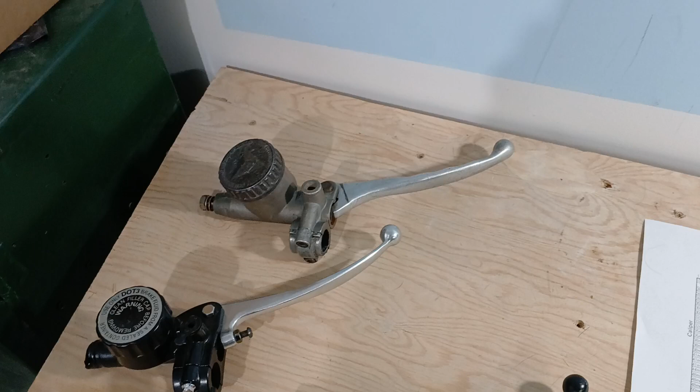Okay, we're going to talk about brakes today and our ways of improving the brakes on the 1974 Eldorado with a single disc, which has been criticised by other people as being a poor brake with a wooden feel. Now, I haven't ridden this bike. It was bought by me as a non-runner and I didn't want to use it until I fixed everything up.

Okay, so thinking about brakes, what to do, because the consensus of opinion seems to be to add a second disc. Now that can be expensive because you've got another disc to buy, and they're not easy to find for those. You've got another caliper to buy, you've got extra hoses to put on. Okay. And you have to make a spacer up for the spindle and various other things. It's quite a complicated job. Is it really necessary? Well, I don't know. So let's think about it for a moment.

Now, another bike that has a reputation for having a very poor brake from the early 70s is the Norton Commando. And I can attest to the fact that the Commando brake is pathetic. It is wooden and hardly stops you at all.

And sadly, this was deliberate by Norton Villiers Triumph, I think they were called at the time. They decided that the British motorcyclist shouldn't have a good brake because he wouldn't know what to do with it. He'd get himself into trouble if he had good brakes because British motorcyclists are used to having shitty drum brakes. And anyway, the only reason we're giving you one is because the Honda's got one and we don't want to lose sales to the Honda. Anyway. Rant over. So anyway, the Norton's got a bad brake.

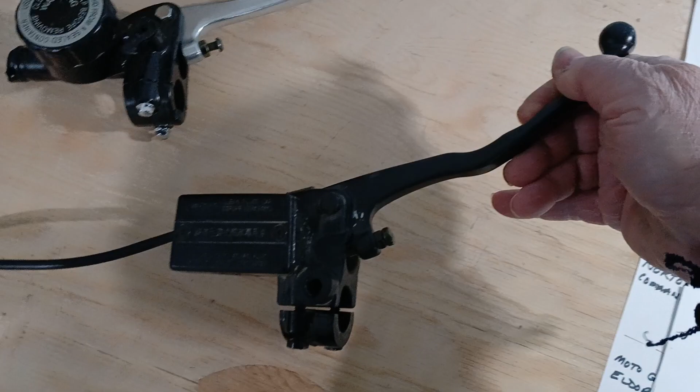But there is a recognised way of improving that brake, and that is to add a 1/2-inch master cylinder in place of the 5/8. And that's what I was going to do on my Commando, and I've got this 1/2-inch master cylinder here.

Okay, now I remember seeing on the internet a few years ago a chart with optimal sizes of master cylinder to caliper size and where to aim for. Now this comes from a company called Vintage Brake, who are out of California.

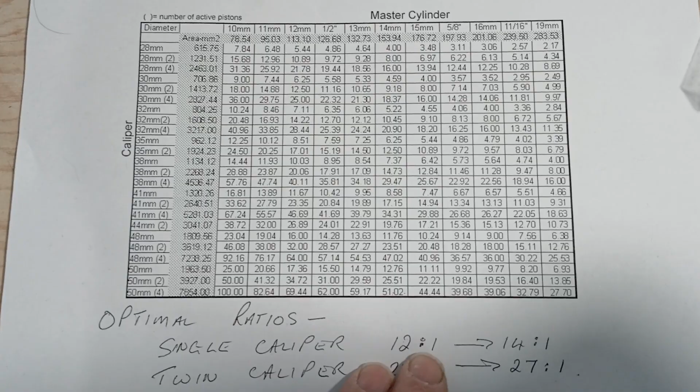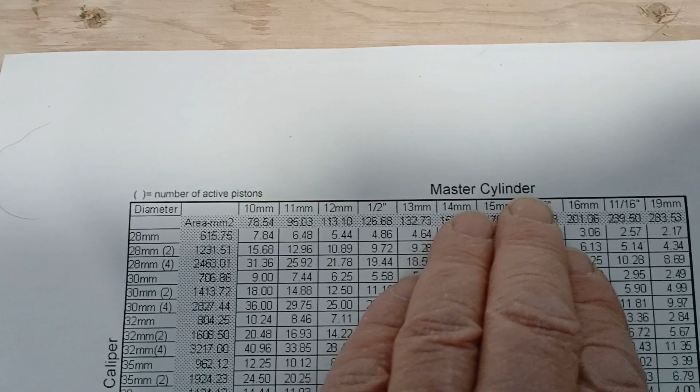This is where I got the info from. There is a description with it, but to cut a long story short, they give the optimal ratios for a single caliper at 12 to 1 to 14 to 1. And twin calipers almost double that. Right. Okay, so we're looking at master cylinder diameters, brake caliper cylinder diameters, and how they affect the feel of the brake.

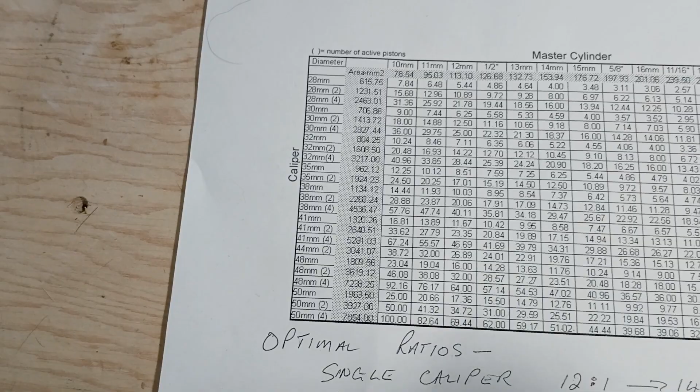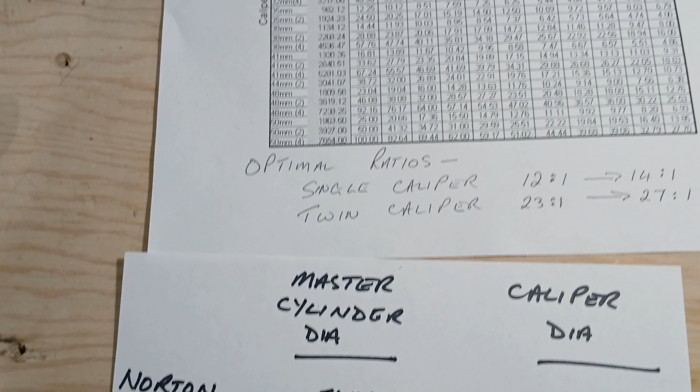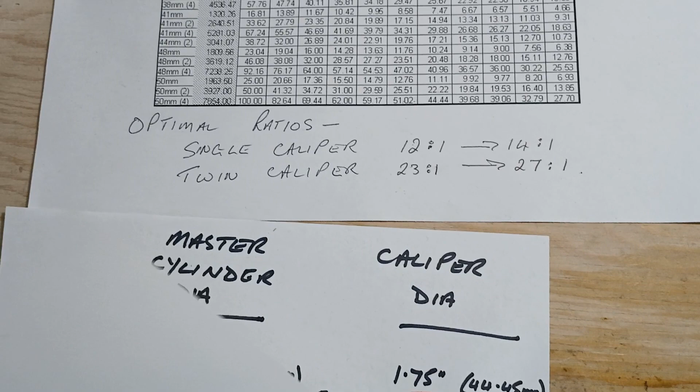We have the area of a circle, which every schoolboy knows, of course, is pi r squared. You did know that, didn't you? I did. Anyway, so the diameter of our master cylinder is 1/2 inch, 12.7 mil. So the radius is half of that. Now, if we go pi, which everybody knows is 3.14, but I can't remember. Anyway, pi times that, which gives us the area of the master cylinder piston is 126.68 square millimeters.

If we do that for the caliper piston diameter, in this case it's a Moto Guzzi one. I apologize, I was going to do the Norton, but this is what turned out. Anyway, so if we do the diameter, half of that is the radius, pi r squared, we get that. So to get our ratio, we divide this by that. So we divide the 1134 blah blah blah by 126 blah blah blah, and we get 8.95. So 8.95 to 1 is our ratio.

Okay. Now then, where was I? No, too much paper here, see?

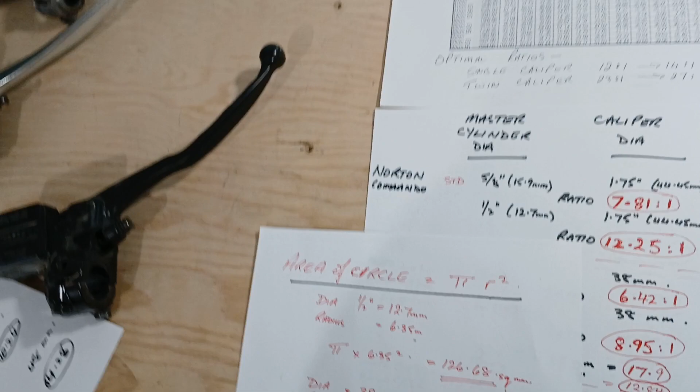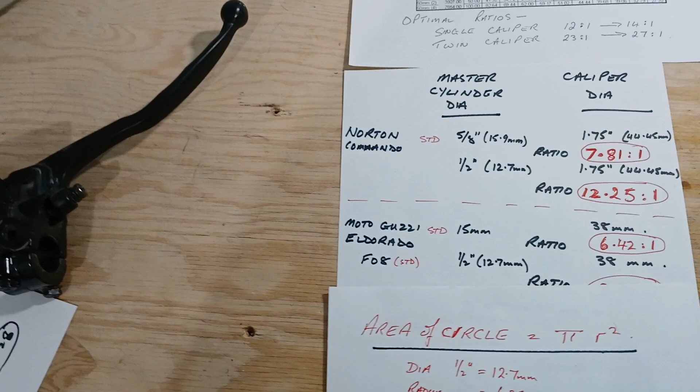Excellent. Where does the Guzzi stand? Well, in standard form, the Guzzi is 15mm master cylinder, and with the F08 caliper, the standard fitment, which is 38mm, we get our ratio of 6.42 to 1. Again, very poor compared to the 12 to 1 that we're looking for. Okay, so that is with my 15mm.

So if I went to my half inch, so 1/2 inch is 12.7 with the same 38mm piston, we get a ratio of 8.95 to 1. So that's not very good, is it? We're still not in 12, so just changing to my smaller master cylinder is not going to help a great deal, is it?

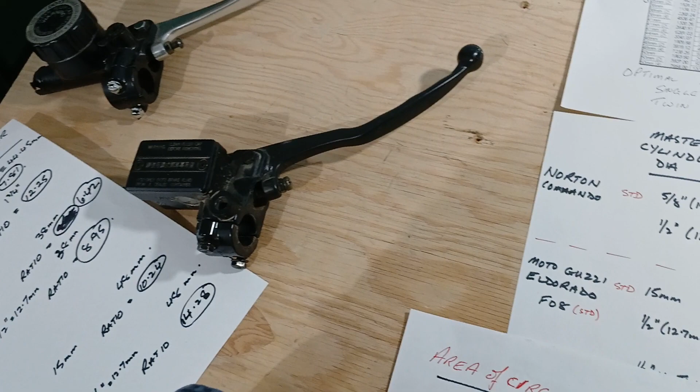Okay, so then if we double up the brakes like they say, and we stay with a standard 15mm master cylinder, the same 38mm calipers, but 2 of them, we get to 12.84. So 12.84 is again right bang in the sweet spot. So the advice to fit a second disc is good advice.

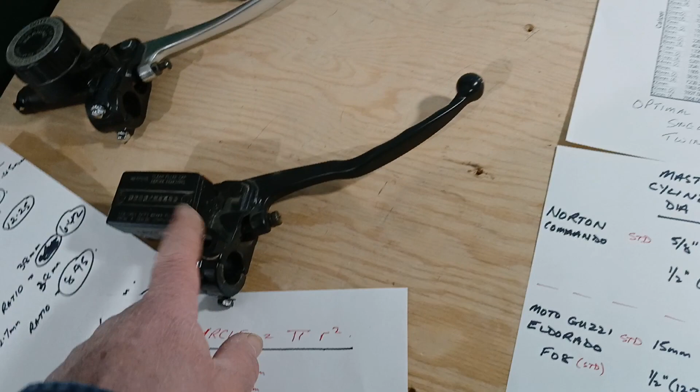And if we use the 1/2 inch master cylinder, it comes up at 17.9, which is in excess of the 14. So that brake may be oversensitive. So yeah, fitting 2 discs is good. We get right there. But we have an alternative.

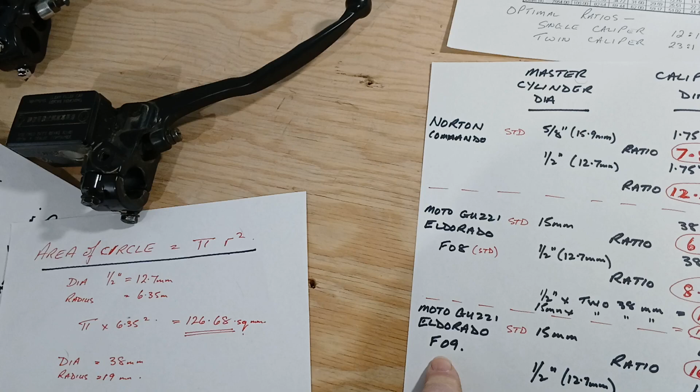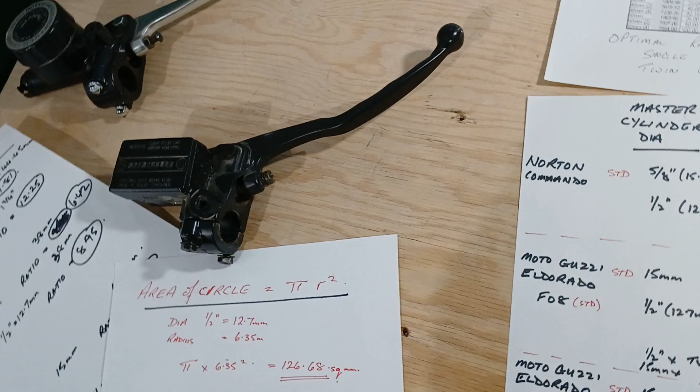We have the F09 caliper, which is the rear caliper for the 1000 SP, and is available. Not the original Brembo, but a copy of the Brembo. So let's look at that. If we put that on, I have heard people suggest that you use that instead of the F08.

If we use a standard 15mm master cylinder, that's that one, and our 48mm F09, because they're bigger than the 38, we get a ratio of 10.24 to 1. So that's a lot better. Is it 12? No, it's not 12. All right. So bearing in mind that I've got this 1/2 inch, let's use that. Let's use the 1/2 inch with an F09.

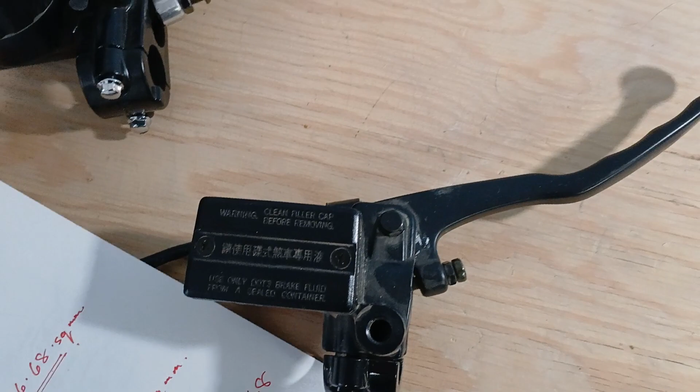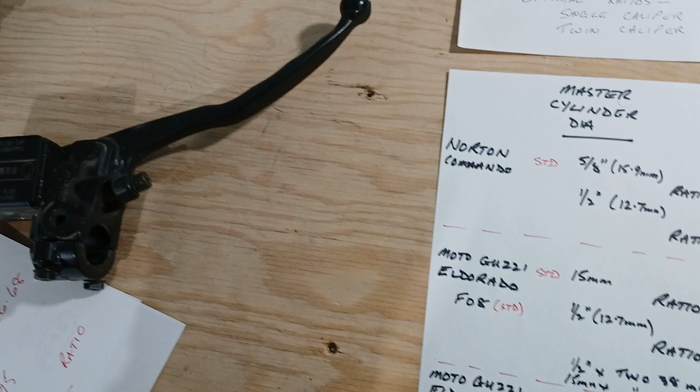So 1/2 inch, F09 at 48, we get a ratio of 14.28 to 1, which is very slightly in excess of that. So I think we have a solution. I think we have a result. If we use this master cylinder with a purchased F09, which I think are about 175 US dollars, which is not bad really, I think that's going to be cheaper than putting 2 F08s on. So I think that's what I'm going to do.

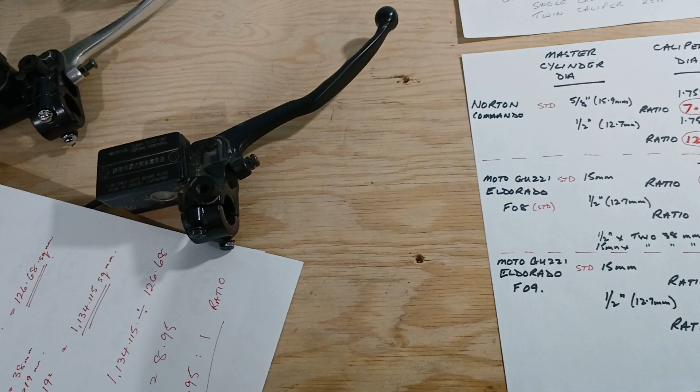I'm going to try it, bearing in mind that my original disc is very good. And we will take it from there.

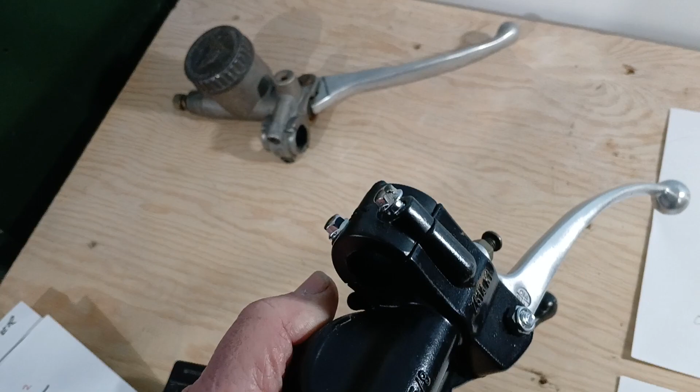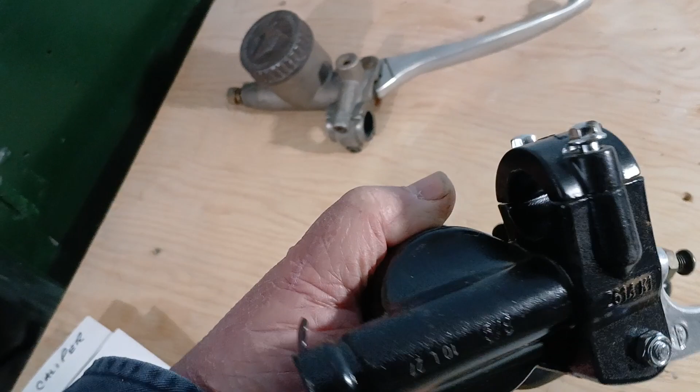So, oh, if you're wondering what this is, it's one I had in store. I don't know what I bought it for. I remembered I had it. Look at it. It's almost identical to the Brembo. And it's a copy of some kind. I thought, well, I'll use that. And then I looked at the bottom and it says 5/8, which is bigger than that. So, yeah, it's not going to work, is it? So anyway, there we are.

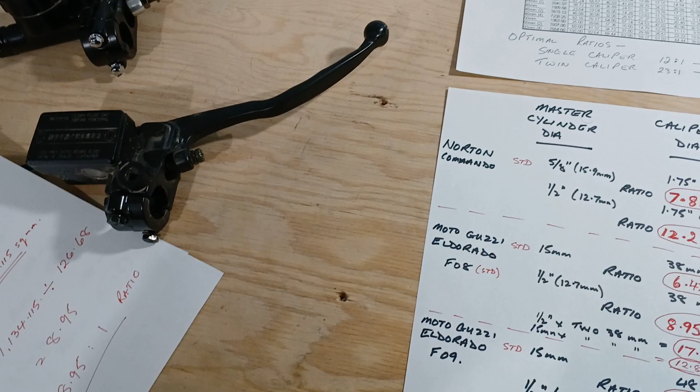Look, we're going to go with this. We're going to get an F09 caliper, and we're going to try a single disc setup with a braided stainless steel brake line.